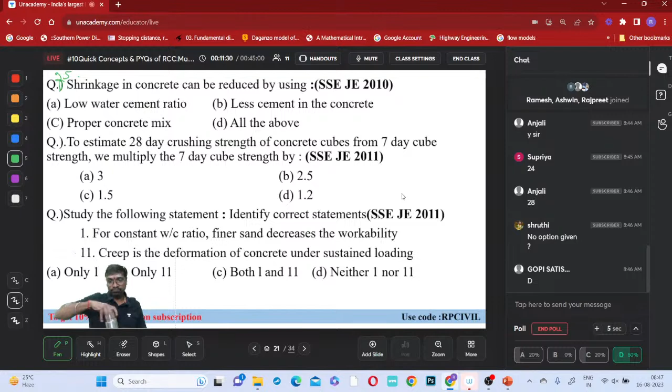So what is it you can say? Shrinkage in the concrete can be reduced by using which one? This is low water cement ratio, less cement in the concrete, and proper concrete mix, right? Which one is correct? All of the above, na? If you do not mix properly, also some voids will be created inside the concrete or not.

What is it be? So lesser cement in the concrete, right? So whenever you are having this lesser cement in the concrete, automatically that requires less water or more water? Tell me.

Lower water cement ratio means water content is lesser. When water content is lesser, what will happen after this water evaporates? Less water is only present. So less water is present means after water evaporation, less voids will be created or more voids will be created? Tell me, less water is present.

Less water cement ratio means less evaporation of water or more evaporation of water? Less evaporation of water only, no? When less evaporation of water is there, what will happen? Less shrinkage, less reduction in the volume will happen, na? So shrinkage will become less, obviously, or not?

When more water is present, only 0.25 amount of water cement ratio will be used for hydration reaction. Remaining all amount of water will be useful for evaporation and losses only. That's it. When more water evaporates, more gaps are created, more shrinkage. But less water, less shrinkage, right? Like that. Is it clear?

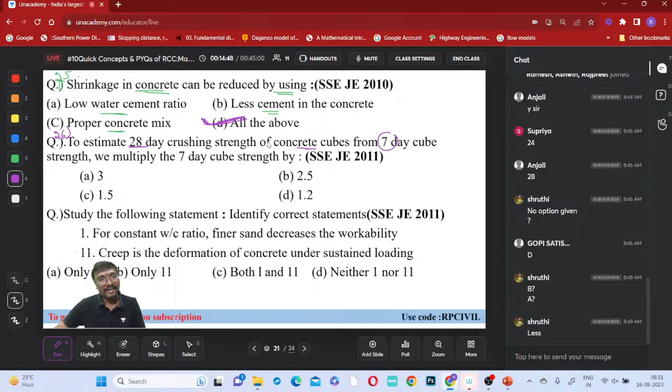To estimate the 28 days crushing strength of concrete cubes from 7 days cube strength, we may multiply 7-day cube strength by. So do you remember that 7 days strength will be equal to 2/3 of the 28 days strength?

Now this is as per the old specification, right? Now do you remember as per the new specification what is the F7 equal to? This is 2011 means old question before the amendment is done, right? That amendment is done in 2013 now.

I have given that amendment 4, if you remember all of you. That amendment 4 is done in 2013. In 2019 amendment 5 is done, okay? So F7 is which one?

0.65 into that FCK, na? Do you remember that, everyone? You observe here. F7 is equal to 0.65 into FCK, na? Then how can you get this FCK from here if you just observe?

FCK will be equal to F7 into 1 by 0.65, right? It is also 1.53 times this F7. FCK is nothing but your F28, na?

So now in this also, which one is the correct answer? Tell me. According to the old specification, according to the new specification, right? According to both the specifications, which one is the correct answer? 1.5 is only the correct answer now, everyone, as per the new specification, as per the old specification, both, right?

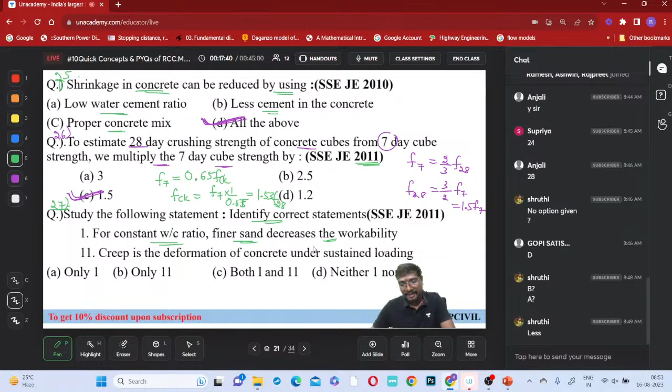Study the following and identify the correct statement. For constant water cement ratio, finer sand decreases the workability, right? Is this correct or wrong? Tell me.

For constant water cement ratio, finer sand decreases the workability. Why does finer sand decrease the workability? Tell me, everyone. Finer sand means sand itself is already a fine aggregate. Coarse aggregate is about 20 millimeter size, while sand itself is much smaller, like 2 or 3 millimeter size.

Very finer sand, what will it actually do? Will it create a proper mix or not? You can say it will not create a proper mix, right?

What happens if you just observe? Very fine particles increase the strength, yes, but actually strength is not mainly due to cement. Strength is mainly due to the coarse aggregate. In concrete, strength is contributed mainly by the coarse aggregate, which is the main element contributing towards strength.

Whenever fineness increases, will the individual particle strength increase or decrease? Tell me, Supriya. If the size of a particle decreases, will the strength of that particle increase or decrease? Consider a 20 millimeter stone, make it into powder, and consider one particle of this powder. Which one will have more strength? Tell me, which one will have more strength?

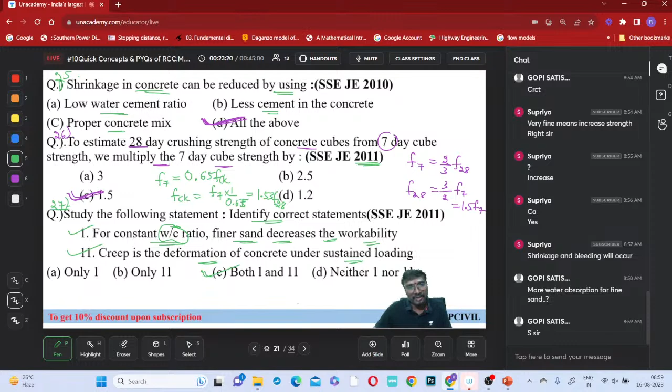Now I will be moving on to the next question, it is 27, 28. Select the answer. 60 seconds time I am giving for this 28th question.

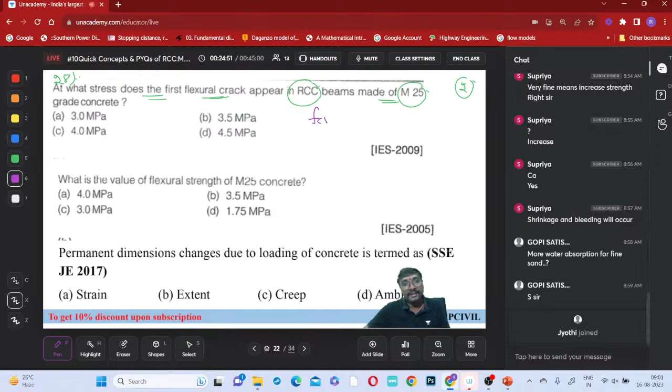Jyoti, good morning. Right, so what is the stress at which the first flexural crack appears in RCC beams made up of M25 grade of concrete? First crack will occur under which condition? If you just observe, first crack will occur at the FCR. What is the FCR? You can say that is 0.7 root of FC, that is 0.7 into root 25, right?

How much will it become? You can say 3.5 MPa. Which option is correct? Option B. This is also same. What is the flexure strength of this M25 concrete? 3.5, same, right? Same question only.

Now tell me, the increase in the strength of concrete with time - is it linear, asymptotic, non-linear, or all of the above? Which one? It is non-linear only.

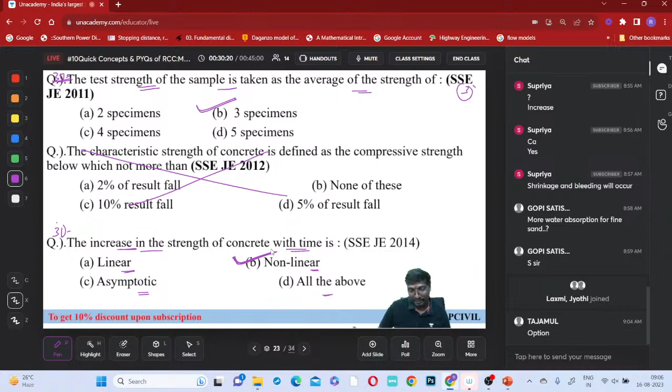There is no linear behavior for concrete anywhere, do you understand all of you? Listen, there is no linear behavior at all - only non-linear behavior you are having, right? Yes, Anuj, correct.

Yeah, Juhi, correct.

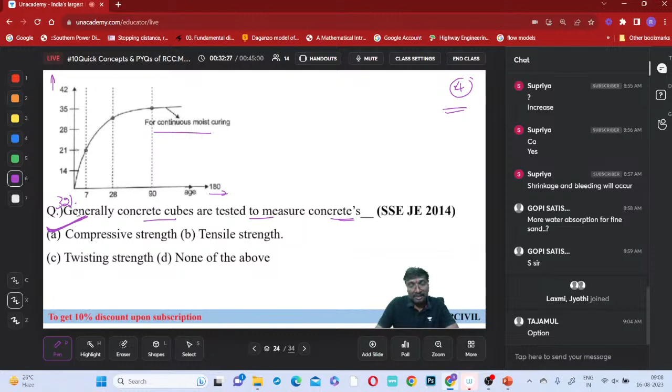No, that was 32. This is question number 33. Select the answer, everyone. Gopi, Ashwin, Supriya, Jyoti answered correctly.

Yeah, Juhi also answered correctly from YouTube. Anjali, Tajamul, Shruti also answered correctly in special - 100% correct answer.

Right, this is the leaderboard: Gopi first, Tajamul second, Supriya third.

Generally, the strength of concrete is considered negligible or very low in tension, right? Is it or no? Very low or negligible strength in tension we consider - that is why we take the help of reinforcement. Now observe, what is the Poisson's ratio of this concrete?

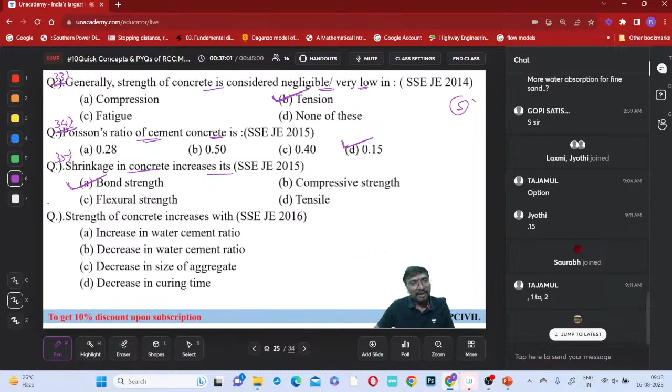Shrinkage in concrete increases its bond strength, yes or no? Shrinkage is nothing but reduction in volume, contraction. So this is your reinforcement bar and this is your concrete. Whenever the concrete is subjected to this contraction, what will happen? It will hold the reinforcement easily, meaning bond strength will definitely be increased. You can say that for sure.

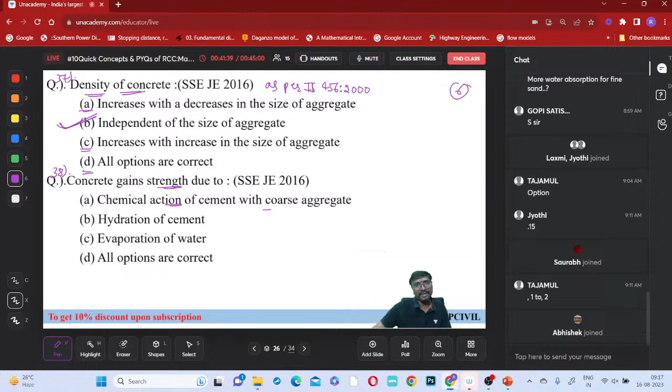Do you have any chemical reaction between this cement and this coarse aggregate? No. Chemical reaction happens between cement and water, not between cement and coarse aggregate. Between cement and water, that chemical reaction is happening, which is called hydration reaction. Once this hydration reaction occurs, that is what gives the material resulting in bonding of particles. So hydration of cement is the main reason, you can say, if you just observe.

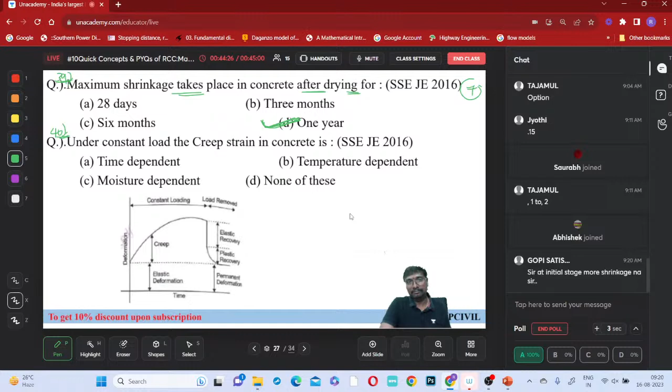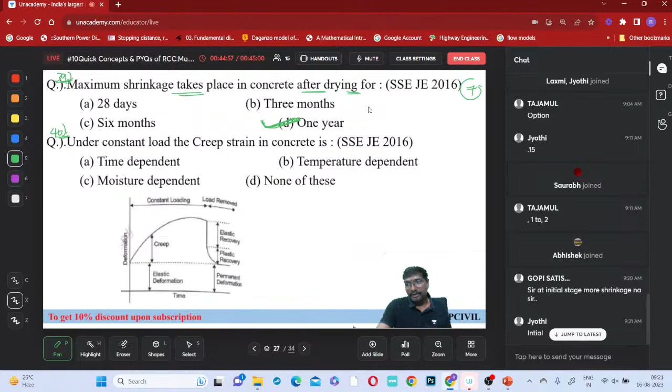See here, just observe - what is maximum shrinkage? When will maximum shrinkage be present, tell me - in the initial stage or later stage? When will water evaporation be more, initial stages or later stages? When more shrinkage happens in the initial stage, will full water be evaporated, or will full water only evaporate at the 1 year time? Tell me, when is more water evaporated?

Maximum shrinkage means this is final shrinkage and it is a continuous process - it is a cumulative effect of the previous shrinkages also. When you consider maximum shrinkage strain, does it take place when complete water is eliminated, or when only some water is eliminated? When complete water is eliminated, tell me - is it 28 days, 3 months, 6 months, or 1 year? Only in the 1 year will complete water be eliminated, is it or no?

So therefore maximum shrinkage means the effect of shrinkage - it does not mean instantaneous effect. It is a cumulative effect you have to consider, okay. Whenever you are considering shrinkage, it is only the cumulative effect you have to consider, not the instantaneous effect. You have to be careful.

So here, under constant load, creep strain in concrete is time dependent, na? Creep strain is which one - this is time dependent, you can say it like that.

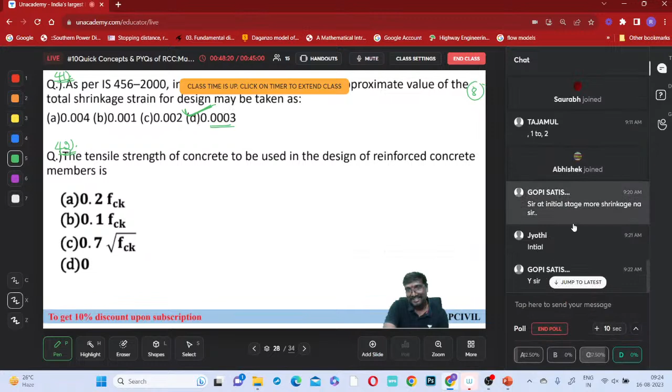Okay, you read the question carefully and answer. Anuj again. Arey yaar, you read the question - it's a trap, it's a very big trap. 100% wrong answer for the last question, successfully.

The tensile strength of concrete to be used in the design of reinforced concrete - what is the tensile strength of concrete we are using? It is 0, na. In the design of RCC members or pre-stressed concrete mentioned, do we use that tensile strength of concrete? It is 0. If the question asks what is the tensile strength of this concrete, 0.7 root fck is the answer. But the tensile strength of concrete used in the design is 0, na - we don't consider any tensile strength of concrete. Have you seen any RCC design by considering the tensile strength of concrete?

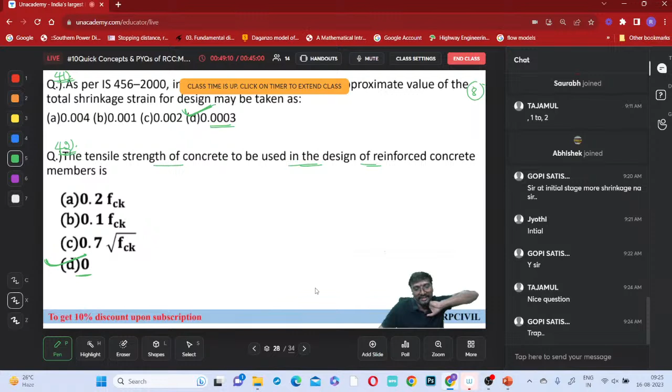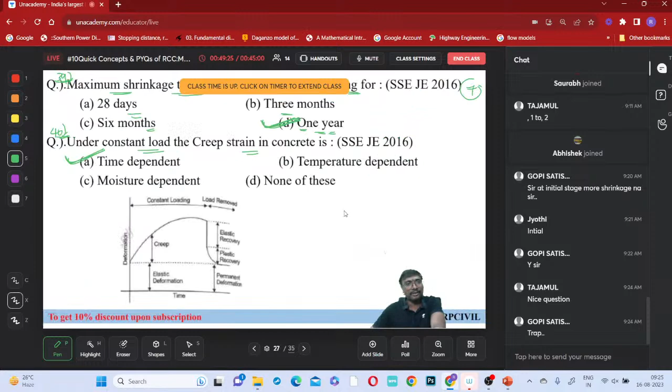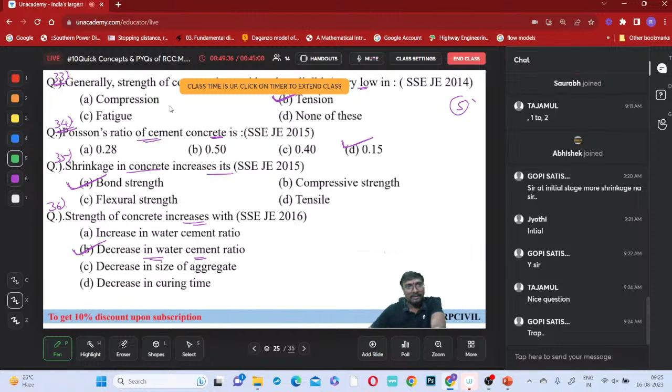Reinforced concrete is mentioned - if it were pre-stressed concrete we could think over it, but it is reinforced concrete. Whenever reinforced concrete is mentioned, what is the tensile strength of concrete? It is considered as 0 in the designs. This kind of question we have already solved somewhere, right? If you remember, somewhere we have solved it - is it negligible or this one? Somewhere it has come recently, where? Forgot. Yeah, generally the concrete strength is very low or negligible in tension, is that so? Yes, so in the design we don't consider this at all, right? Like that, is that clear?

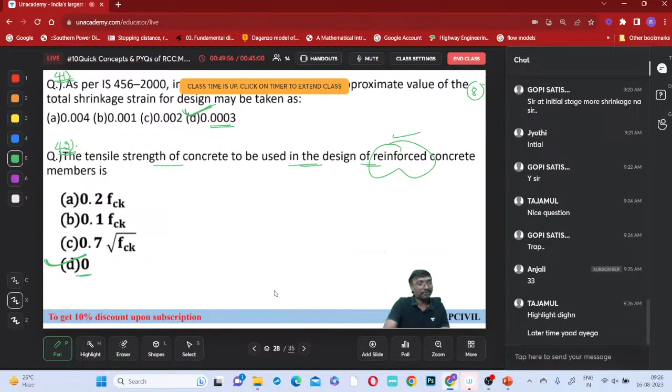Later you will remember this. Okay, you have to be careful. That is why we - KP sir and myself - are telling you many times why you need to solve PYQs 3 times, 4 times. This is the reason, okay. We just solved it now, but you did not remember, na?